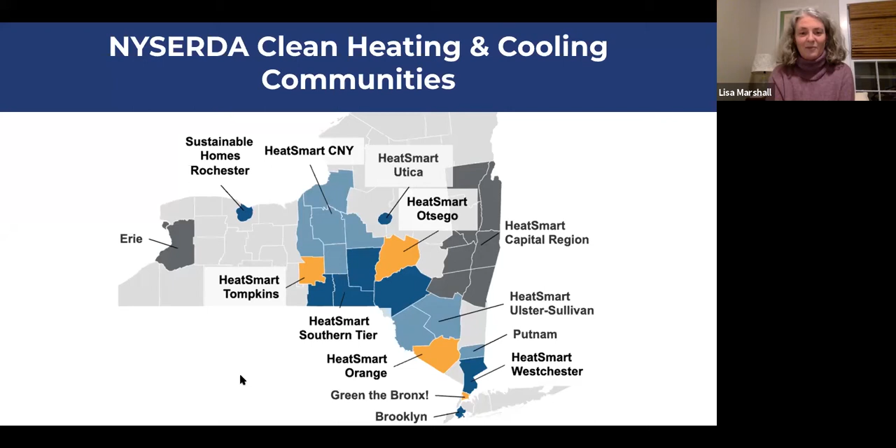So why do we need such a thing as a clean heating and cooling program, or a HeatSmart program? Well, the reason is because you might have heard about the climate crisis, or some are calling it the climate emergency. The reason we're having a problem with our climate is because of all the greenhouse gas emissions from burning fossil fuels, mostly, that are going up and up and up each year, and have been, I'm 52, going up every year of my life without any pause. In order to maintain a livable climate for us and our children, and all of the wonderful diverse species on the planet, we're going to need to do something about this pretty quickly.

So when we look at where those greenhouse gas emissions come from here in New York State, they come from basically three main sectors, which are transportation, on-site combustion, and electricity generation.

This on-site combustion piece of the pie is 38% here, which is a little bit of a fudged number. It's actually a bigger number total than transportation if you calculate it a slightly more honest way. A lot of that on-site combustion is home heating, and that's because 90% of our households in New York use fossil fuels to heat our homes. So 90% of us have a furnace or a boiler churning away, eating up fossil fuels to produce heat. That is why HeatSmart exists, to help educate people and make it easier for people to adopt alternatives to that current scenario.

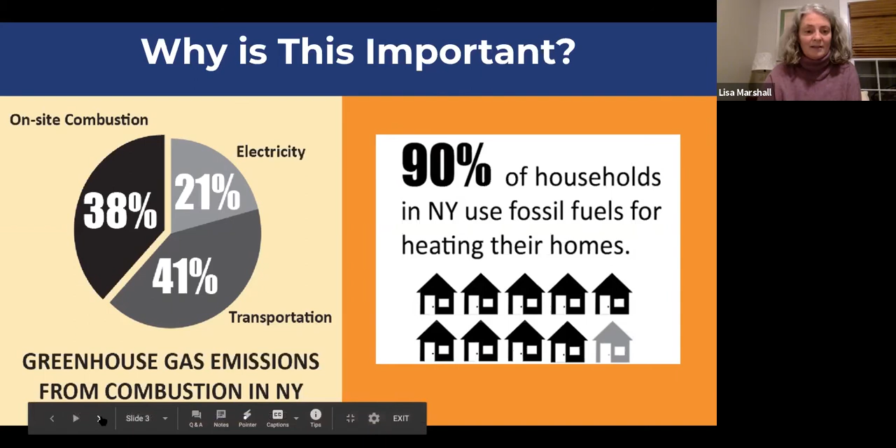So how do we do that? Well, that's a pretty daunting question. The main way we are going to reduce our greenhouse gas emissions in these sectors, transportation and home on-site combustion, is something that's been termed beneficial electrification. So if we electrify our cars and if we electrify our heating, we can immediately have more efficient heating and transportation in our homes and for our cars with the current way that we generate electricity.

And then as we add more and more renewables to the electricity grid, those methods of transportation and heating become even more efficient. This is a great graph from the Acadia Center that shows, at the top, what most of us have now: a fossil fuel car and a fossil fuel burning heating system in our house, and how many million metric tons of CO2 are produced by that. Down below, you can see that drops significantly if you switch to electricity. This says current RPS, that's with the way we produce our electricity now. Then as we increase renewables, more wind, more solar on the grid, these become even more efficient and we're emitting less carbon dioxide. So in a simplified way, that's what beneficial electrification is all about.

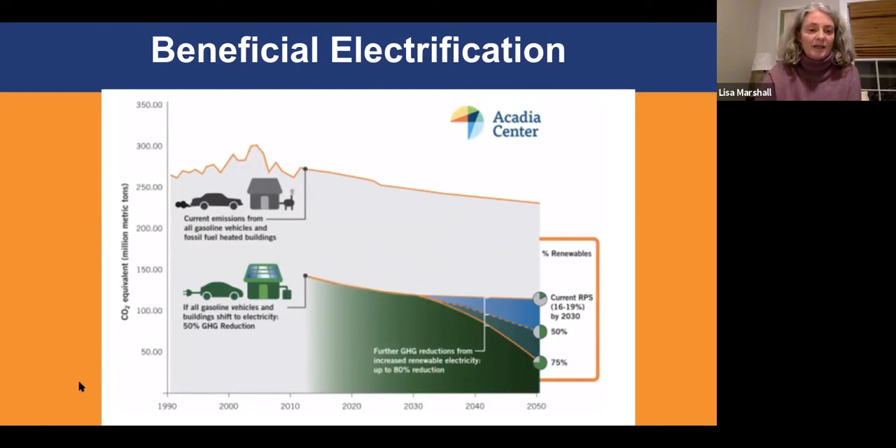So more specifically, since this webinar is steps to a fossil-free home, how are we using energy in our homes? This is not for New York - the next slide will show you New York more specifically, but I liked this slide because of the cute little house. This is sort of an average house in the US and how they use electricity.

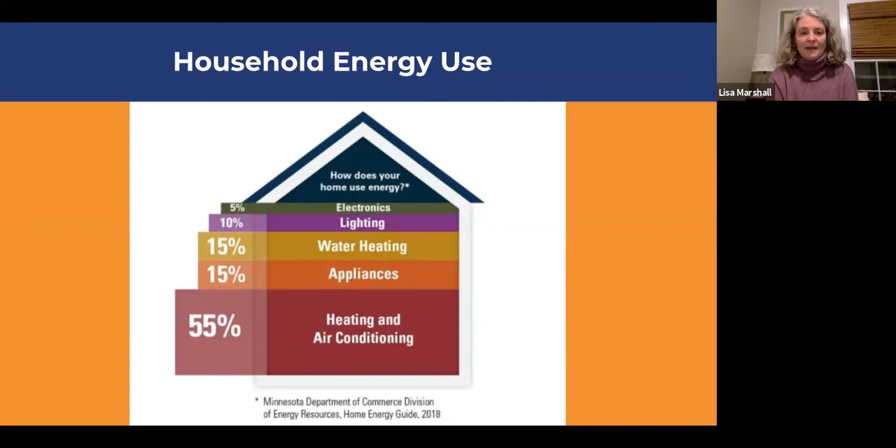55% of our energy use in our homes, not electricity, excuse me, is heating and air conditioning, and most of that is heating. Only a very small sliver is air conditioning. 15% is running our appliances, 15% is hot water heating, 10% is lighting, and 5% is electronics, so the cell phone, the computer, the TV, etc. That is the sort of average breakdown. Of course, your mileage may vary.

This next slide shows you a little bit more closely how we're using energy in our homes here in New York. On the right-hand side, it's showing New York compared to the average mid-Atlantic states region and the whole US. As you can see, heating for us is space heating - this pink part is 56% of how we're using energy in our homes. It's just huge because we live in this cold climate, and only 1% in New York is air conditioning. This is a little bit of an older graph, I think it's from 2012, so that may have shifted somewhat in the intervening years, but generally speaking, it's about right.

I want you to notice this 17%, this orange pie piece for water heating, because we're going to talk about that as one of the steps to a fossil-free home. And then 26% is appliances, electronics, and lighting.

I'm not really going to talk about lighting, but I'll do a shout out right now: if you haven't ever worked with the energy navigators to have a look at your own house, they are a great group. They're volunteers who are trained as energy navigators, and they will come to your house and help you look at things very specifically, like your lighting. Basically, if you're not using LED light bulbs yet, get on it, because it's by far the longest lasting and most efficient light bulb. That's all I'm going to say about light bulbs.

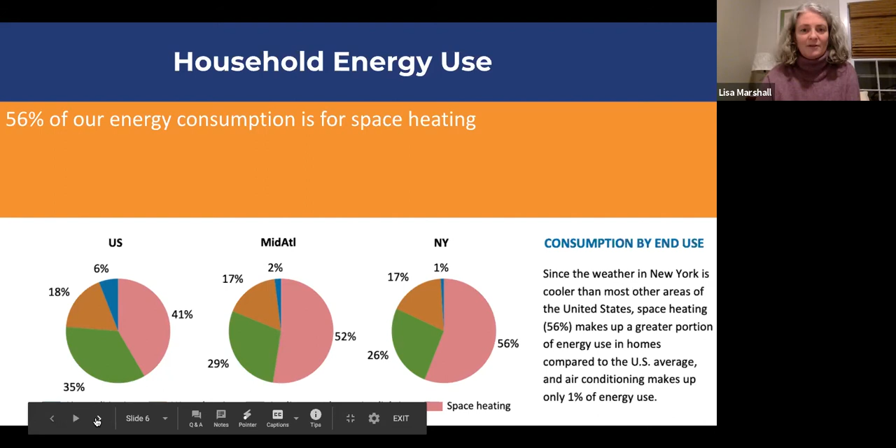So 56% of the energy in New York households is for space heating, and 17% for hot water.

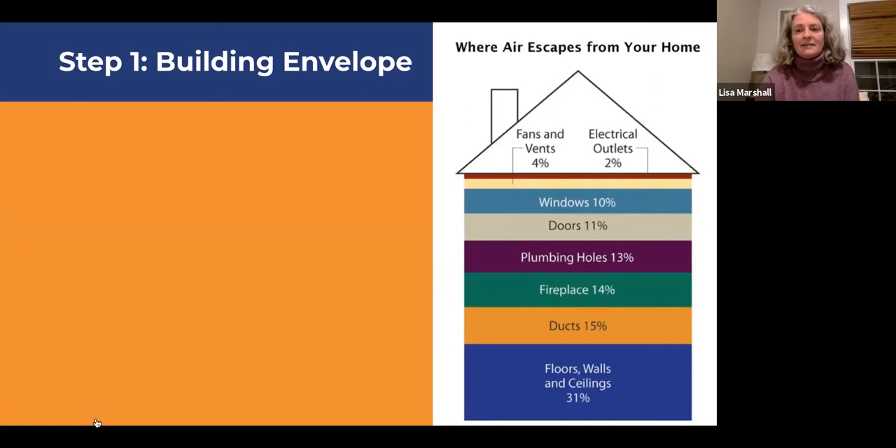So what are these steps that we're talking about? Step one is the building envelope. That is how well insulated and sealed your house is. As you can see on the right here, this is how heat energy escapes from your house.

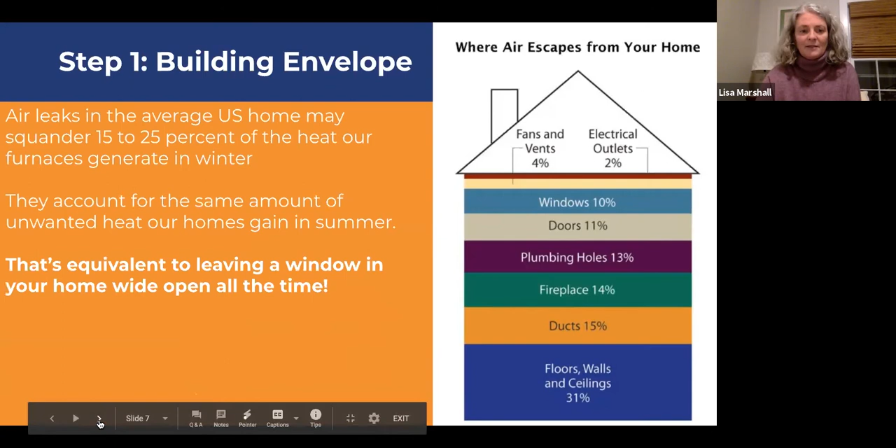All these different places, and the most is the floors, walls, and ceilings, but also the ducts, the fireplace, the plumbing, doors, windows, fans, vents, and electrical outlets. I just want to point out that windows is 10% on average in this graphic.

A lot of people will say the first thing you should do is replace your windows, and I don't think that's the first thing you should do. I personally preserve the beautiful antique wood windows in my house and try to seal up other things first. Windows are a big piece, but they aren't as big as most people think.

In the average home, air leakage is squandering 15 to 25% of the heat you're producing. So the first step to a fossil-free home is to make sure you're not literally throwing that heat out the window, so that you're burning less fossil fuels to heat your house while you're still using them. The same amount of unwanted heat is coming into our houses in the summer equivalently.

That's not good. It's about the same as if you had a completely sealed house, but you left one window wide open all winter long. None of us would do that. Of course, that's a horrifying thought, but that's actually what we're all doing, if we haven't taken care to seal up our house properly.

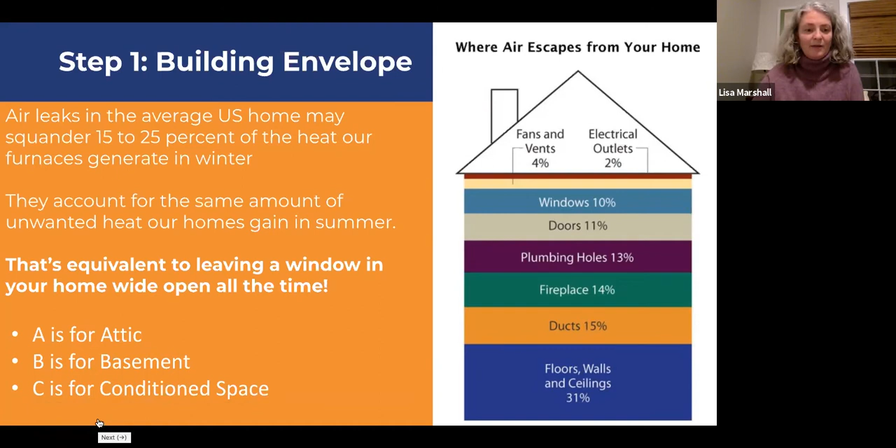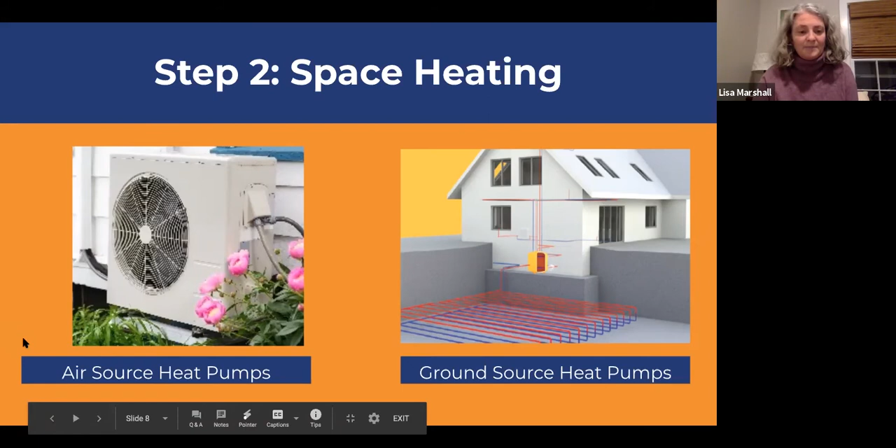On the right, this graphic is showing some ground coils for a ground source heat pump system. I'm going to talk a little bit more about those. They're going to get top billing in this webinar.

So what is a heat pump? If you're not familiar with heat pumps at all, you might be confused about them. Actually, all of you have a heat pump in your home—that's what runs your refrigerator. You might have noticed there's a refrigeration loop on the back of your refrigerator that keeps the inside cool, and you might have put your hand behind it and felt that it was very warm out there. That's because of the way the refrigeration loop works.

Inside that loop is a chemical called a refrigerant, and the loop works on the principles of physics. When you condense the refrigerant, you get heat out because there's a phase change. And when you expand it, you get heat in when you evaporate that refrigerant. It's sort of a genius thing, because it's an incredibly efficient way to take heat out of the air or out of the ground and put it through this refrigeration cycle that allows you to use that heat to air condition or heat your house.

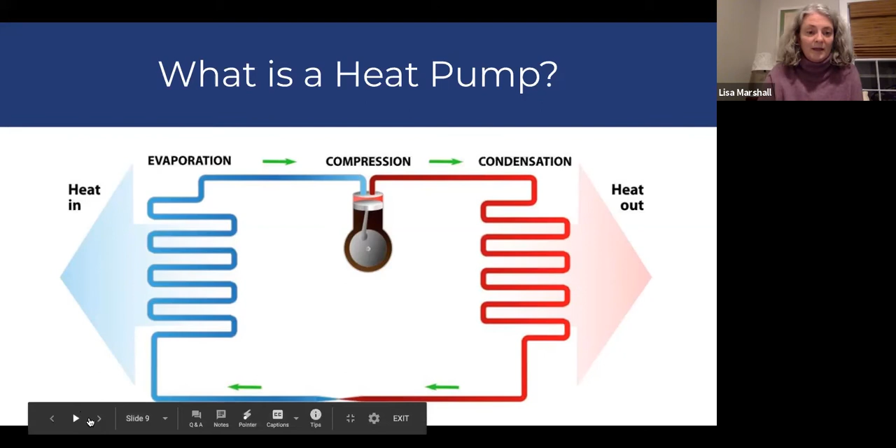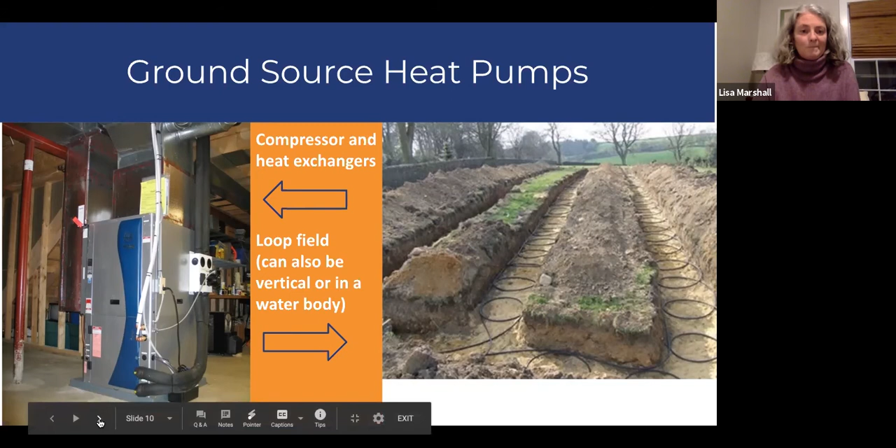We also have air source heat pumps. A very popular kind of air source heat pump is the ductless mini split. It's very popular because it's incredibly versatile. You can sort of put one of these almost anywhere that you need some heating or some air conditioning.

In fact, a lot of people in this area have ductless mini splits for air conditioning, and they don't even know that they could be used for heating, which is really unfortunate because they spend a lot of money on an air conditioning system that if they had invested in one that was a good, efficient cold climate ductless mini split, they could use it for their heating as well.

And something that's really important to understand about these air source heat pumps is that a lot of people think that they don't really work in cold climates like ours. And that did used to be true, and it's not true anymore. There's fantastic progress been made in the technology for these air source heat pumps, and they work great.

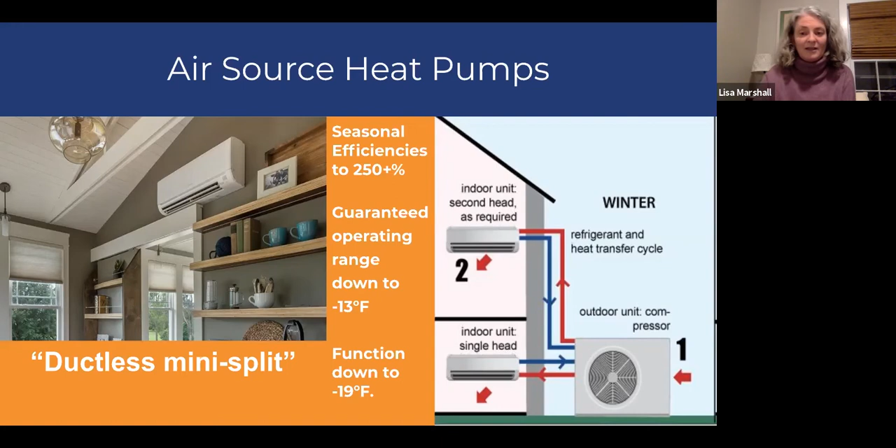And these are, because the outside air is quite a bit colder than the ground, their efficiencies are not quite as good as a ground source heat pump, but still they can be up to 250% efficient, which is really great. Definitely a lot more efficient than any kind of fossil fuel burning you might be doing in your house.

And just want to let you know, in terms of heat pumps, how inexpensive they are to operate as compared to the fossil fuel options that many of us are using in our homes, and even compared to pellet stoves. Ground source heat pumps are the absolute cheapest kind of heating to operate, except for a wood stove. And they also are much more efficient and provide air conditioning as well. Air source heat pumps are a close second.

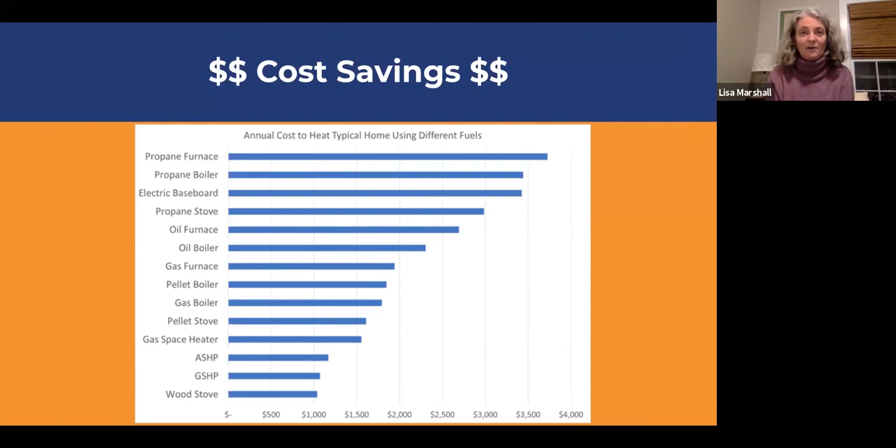So if you are heating with propane, there's just, as somebody said yesterday on Facebook, I thought I couldn't afford heat pumps, and then I realized I couldn't afford not to have heat pumps. So I'm going to keep that in mind.

I'm not going to talk too much about the incentives, but just to say there are incentives available to help make the upfront cost of heat pump installation more affordable. These are the incentives through NYSEG or whatever your local utility is. They could be different for different utilities, but in this service area, we have NYSEG, and this is what they offer: $1,500 off per 10,000 BTU hours of heating load for ground source, and $1,000 off per 10,000 BTU hours of heating load for air source.

Since most of us have no idea what that means, I can just tell you a typical rebate for ground source is going to be close to $4,000 to $9,000 off the top of installing such a system, and $2,500 to $6,000 off the price of an air source heat pump, depending on the heating load that you need for your house.

For the rest of this year, there's also a 26% federal tax credit for ground source heat pumps, and a measly $300 Energy Star tax credit for air source heat pumps. But hey, $300 is still $300.

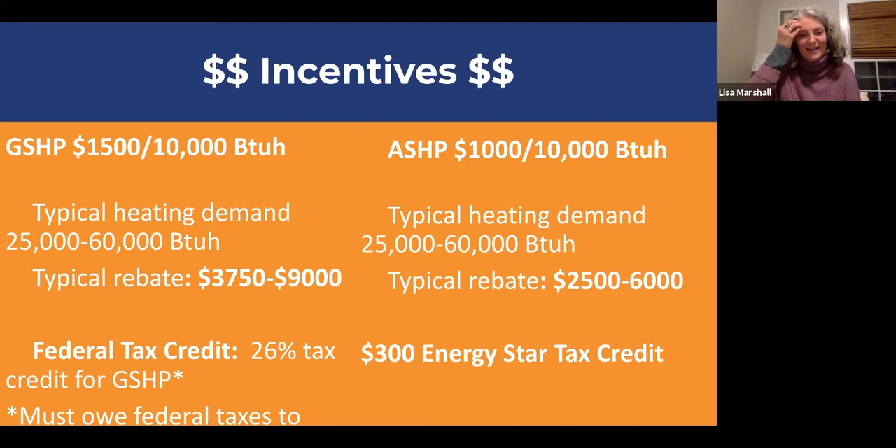Next year, that federal tax credit for ground source heat pumps goes to 22%, unless something changes at the federal level. And there are a lot more incentives to help folks pay for these heating systems if you are income qualified. We've just done a couple of webinars on that. You can find them on our website, or you can get in touch with me to find out more.

If you're heating with propane, oil, or electric resistance heat, there's going to be a heat pump pilot to help people who are income qualified convert to heat pumps who are heating with those fuels. Please get in touch with me if you're interested, because it's going to be a really great, but also very short-term opportunity available to you.

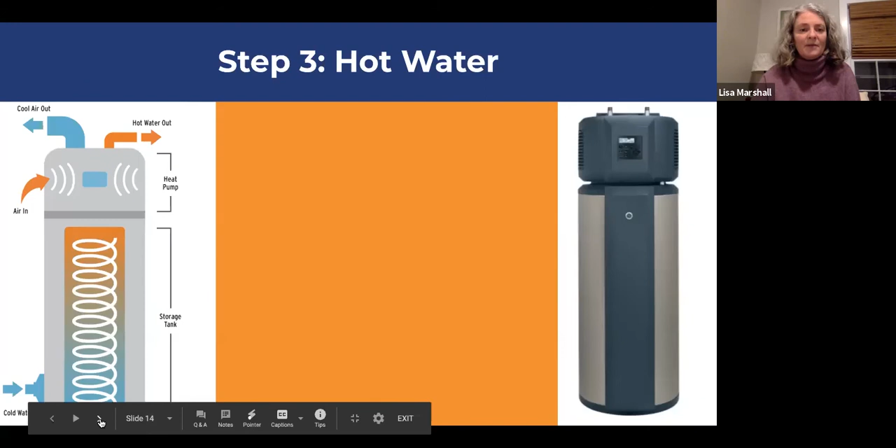Okay, so step 3. Step 1 was your envelope, step 2 is your heating system, and step 3 is your hot water. What we recommend here at HeatSmart is a heat pump water heater.

There are different numbers: 15% of your home's energy use, 17%. This slide says 23%. I can't remember where I got that number from, but it's probably about 20% for most of you. These heat pump water heaters are up to 3 times more efficient than the water heater you're using now. They have very low operating costs because they're heat pumps.

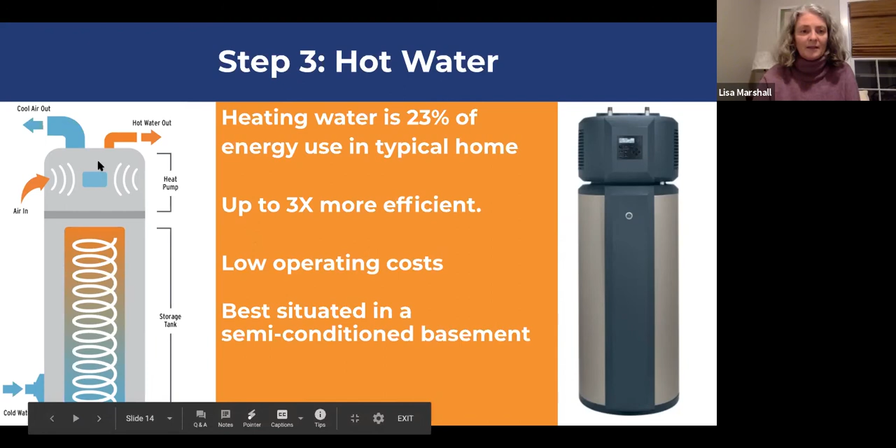You have to pay a little attention to where you put these, because this little top unit, or also this one that sits on top of the water heater, is a heat pump. So it's taking heat out of the air. You don't want it in your living space that you're trying to keep warm—that's counterproductive. You want it in a basement space, that's best. Also, they're a little taller than a conventional water heater, so if you don't have a tall enough basement, that might not work for you. But if you can,

this is what we highly recommend here at HeatSmart. And we're really thrilled that NYSEG came out with a $700 rebate for these guys. There didn't used to be any rebate, and now there's $700. And again, for the rest of this year, there's a $300 Energy Star federal tax credit that you can apply for. So that's $1,000 off the price.

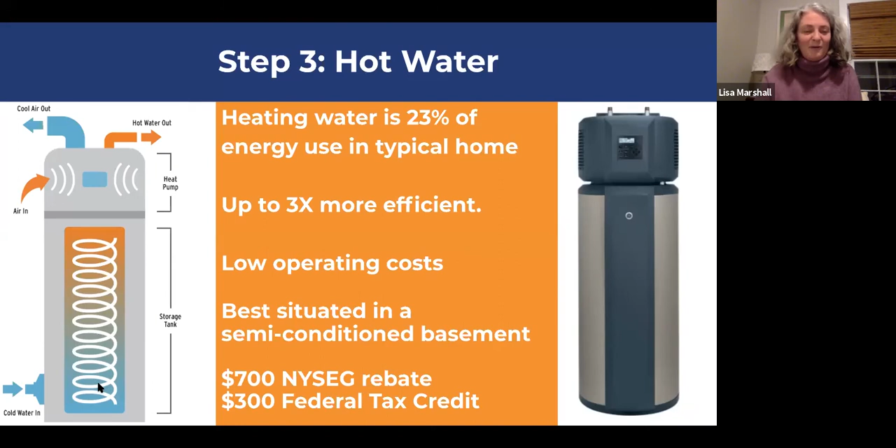So there's really no reason not to put in one of these water heaters if you are looking for a new water heater. I should have said at the beginning, the order of the steps might be different for each homeowner, and we can talk about that later. I put them in order of how I prioritize them in my head, but step 1 for you might be the water heater and not the building envelope. I just want to throw that out there. Okay, so that's step 3.

Step 4, cooking. I find that a lot of people are ready to give up fossil fuel heating, but they're not ready to give up fossil fuel cooking because they say, well, good chefs cook on gas. That's because they haven't met the wonderful induction cooktop or stove. They are much more efficient, cleaner, safer, and cooler. In other words, they're not going to heat up your kitchen in the middle of summer because you're not going to have an open flame there.

Induction cooktops work basically like a magnet that connects to your pot or pan, and that magnetic connection is what creates the heat. So the food that's being cooked gets 90% of the heat that's generated, as opposed to when you're burning gas, where 40 or 55% of the heat generated actually goes to the food. The rest is heating up your pot, heating up your kitchen.

Top chefs all over the world really recommend induction cooking. Everywhere in Europe that you go has an induction cooktop. And these days, the snazzy fancy thing to have in a gourmet kitchen is a snazzy fancy induction cooktop. Gas is past, and this is the way to go.